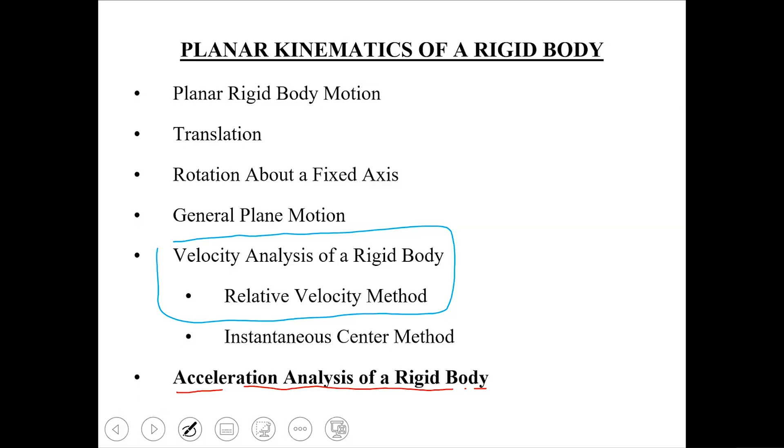So probably we are going to solve 2 examples relevant to this acceleration analysis, and since in both those examples the angular velocities are unknown to us, so probably first of all we need to perform the velocity analysis. तो एक तरह से आपकी क्विज की रिवीजन भी हो जाएगी जब हम velocity analysis perform कर रहे होंगे. So starting with the first problem,

which is problem 16-120, in which we have a rigid body mechanism being shown to us. The piston is moving towards the right with a speed of 5 feet per second and an acceleration of 3 feet per second square. We need to determine the linear acceleration of point A, which is constrained to move within the curved path having a radius of 1.5 feet.

So in order to determine the acceleration of point A, first of all, since omega is not known to us, we need to find out this omega, that is omega of this rod AB. In order to perform the velocity analysis first, can you tell me what should be the value of VB vector? We are using the conventional XY coordinate system.

Since the piston is moving towards the right, point B or piston B would be moving with a speed of 5 feet per second. That is, the vector form of VB is going to be 5i. What about the motion of link AB? Is it rotation or general plane motion? General plane motion. So it is general plane motion.

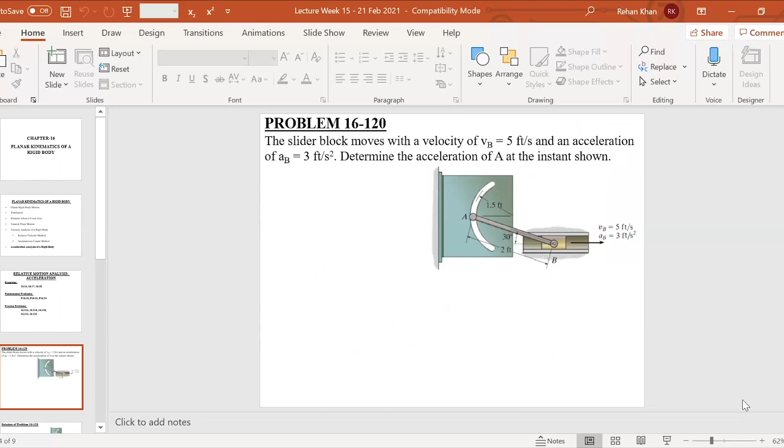Okay, now moving on to the acceleration analysis. In order to perform the acceleration analysis, it is given to us that this piston is moving towards the right with an acceleration of 3 feet per second square. So again, starting from that piston, the acceleration of point B is given to us as 3i feet per second square. And since link AB is in general plane motion, we are going to write the relative equation for this link AB, taking B as our base point.

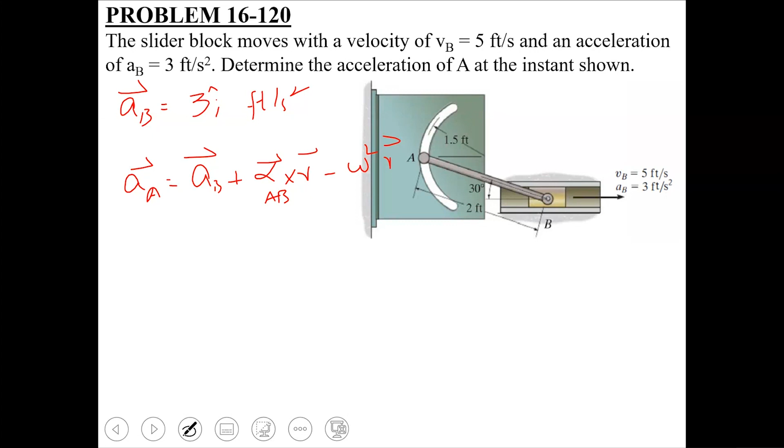So that equation would become aA, which is the absolute acceleration of A, should be equal to aB, which is the absolute acceleration of B, plus alpha cross r minus omega square r, where alpha is going to be the angular acceleration of this link AB, omega is going to be the angular velocity of this link AB, and r is going to be the relative position of A with respect to B.

So these are the vectors जो कि हमने लिखने होंगे. As we know that aB is basically equal to 3i plus alpha cross r. Again, alpha is assumed to be in a counterclockwise direction, so we can write this as alpha AB k cross rAB. rAB हमने already निकाला है पिछले step में, which is minus 1.732i plus j. So this was our rAB, minus omega square. Omega अभी again हमने last step में निकाल लिया था, which was 5. So 5 square into minus 1.732i plus j. So this is going to be our right hand side of this equation.

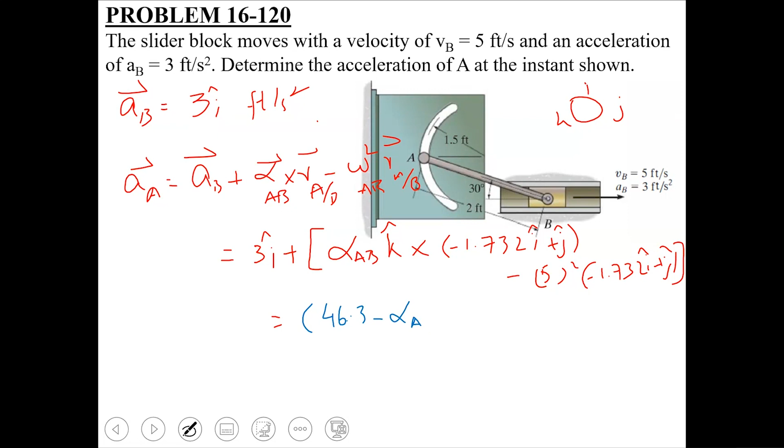Again, we are going to use the smaller circle method for finding the cross product. So once we evaluate this cross product, the right hand side of this equation would be of the form, अगर मैं उसको simplify करके लिख दूं, it should come out to be 46.3 minus alpha AB i minus 1.732 alpha AB plus 25 j. So this is going to be the right hand side, whereas the left hand side represents the absolute acceleration of point A. So let us say that this is our equation number 1.

Okay, now as far as the acceleration of point A is concerned, since point A is constrained to move in a circular path, the acceleration of point A would comprise of two components. The first one is the tangential component of acceleration, which is aAt. The second one is the normal component of acceleration, which is aAn, and the total acceleration is going to be the vector sum of tangential and normal components. I hope के ये चीज याद है आपको chapter number 12 की. Yes. Okay, so what about the normal component of acceleration? What should be its magnitude?

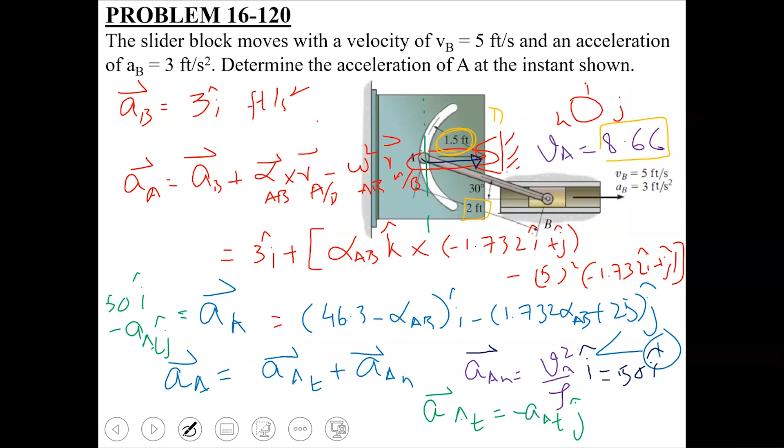So replacing this AA as 50i minus AAT j and then comparing the i and j coefficients on both sides of equation number 1. If you compare the i coefficients, 50 should be equal to 46.3 minus alpha AB. Once you compare the j coefficients, minus AAT should be equal to minus 1.732 alpha plus 25. So once you solve it, alpha AB comes out to be minus 3.70 radians per second square. The negative sign indicates that the assumed direction of alpha is reversed. That is, alpha is acting in a clockwise direction.

Solving for the other unknown, AAT, will give you 18.59 feet per second square. And since it comes out to be a positive quantity, the direction of tangential component is in line with the direction of velocity. Is this point clear to all of you? Yes. So once you have found AN and AT, the overall acceleration would have a magnitude of AT square plus AN square whole under root, which comes out to be 53.34 feet per second square. Clear है? कोई query velocity acceleration के हवाले से जो आप पूछना चाहें?

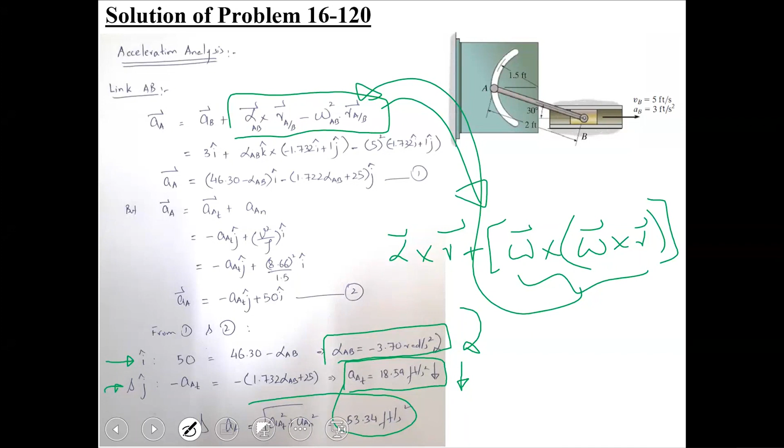Okay, any other thing which you want to ask regarding problem 16-120? Okay, so moving on to the final problem of this course, problem 16-121, and you can expect a problem of this sort in your final exams as well. Again you have a rigid body mechanism with a link AB, the crank, rotating with an angular velocity of 6 radians per second and an angular acceleration of 2 radians per second square, both directed clockwise.

So this crank AB is rotating in a clockwise direction with this much of kinematics. You are asked to determine the acceleration of point C, which is constrained to move within the curved path shown, having a radius of 150 millimeter. You also need to find the angular acceleration of this connecting rod. Since omegas are not given to you, so first of all, again, आपकी एक तरह से revision हो जाएगी.

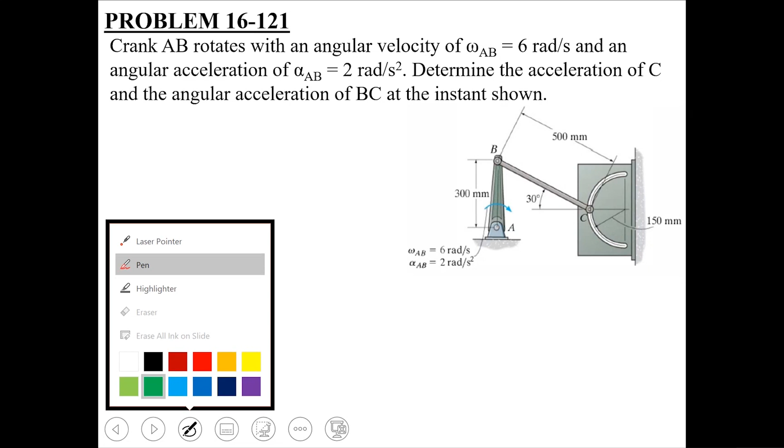We need to perform the velocity analysis, and then we are going to determine omega BC from that analysis, and then we are going to use that omega in order to perform the acceleration analysis. So velocity analysis हमने शुरू करनी है. किस लिंक से हम उसको स्टार्ट करेंगे? लिंक AB. Link AB से start करेंगे.

So in order to find out the velocity of point B, since link AB is in pure rotational motion with respect to point A, VB should be equal to omega cross R, where omega is the angular velocity of this link AB and R is basically the absolute position vector RB. Now, since this link is already given to us rotating in a clockwise direction, we are going to put its correct value, which is minus 6k because of that clockwise rotation. अब आपने assume नहीं करना, जो चीज आपको given है उसको आपने उसी form में लेना है. So it is going to be minus 6k cross RB.

So what is this vector RB? Vertical 300 millimeters. So vertical है 300 millimeter, positive, negative? The positive, upward. So it is going to be 0.3j. So once you take this cross product, what is k cross j? Negative i. Negative i, so negative negative positive हो जाएंगे, and it comes out to be 1.8i. So VB is going to be 1.8i. Okay, moving on to the next link.

Which is the next link at which we are going to move? BC. It is the connecting rod which is link BC. So what should be our base point? Point B. So we are going to write the relative velocity equation, which is VC equal to VB plus omega cross R. Now omega is going to be omega BC, which is the angular velocity of this link, and R is going to be the relative position of C with respect to B.

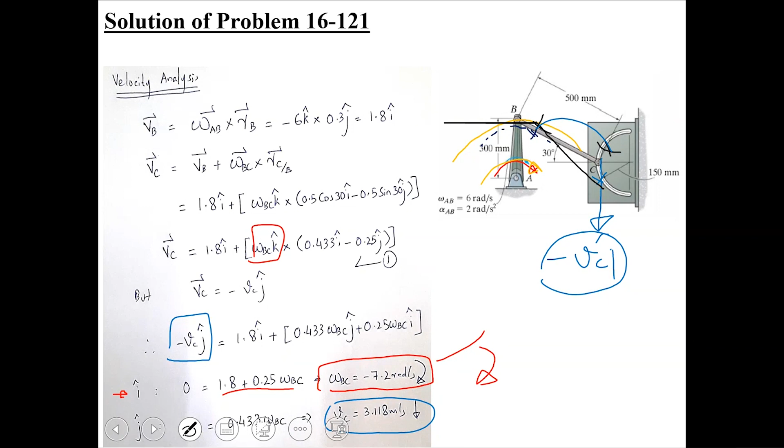Okay, so once you have completed this velocity analysis, let us now move on to the acceleration analysis, because we were asked to determine the acceleration of point C as well as the angular acceleration of this connecting rod. So in order to start this acceleration, we are again going to start from point B, but since point B is doing circular motion with respect to point A, what should be the acceleration vector of B with reference to link AB? Point B is in pure rotation with respect to point A. So acceleration क्या होगा? Alpha cross R minus omega square R, where alpha is the angular acceleration of AB, omega is the angular velocity of AB, and R is the position vector of point B with respect to fixed point A.

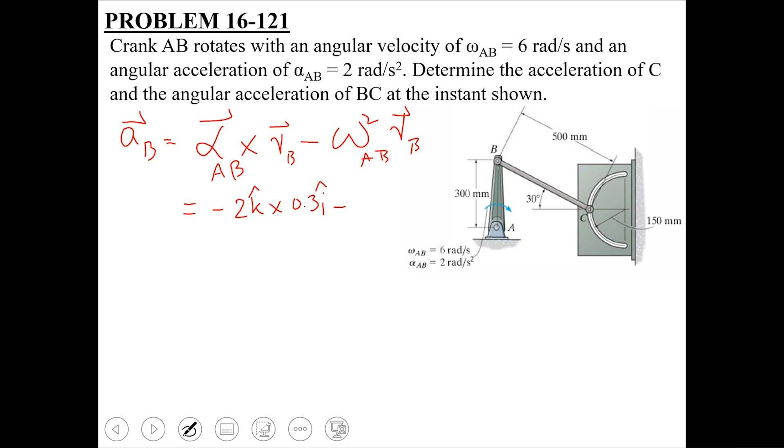So alpha cross R minus omega square R. Alpha is given to you as 2 radians per second squared in a clockwise direction, so you are going to write it as minus 2k cross 0.3 J. इसी तरह minus omega AB, which is 6 square, times 0.3 J. So this would become 0.6 I minus 10.8 J meter per second square. So this is going to be the absolute acceleration of point B. Clear है यहाँ तक? Okay, the next link to which we are going to move is the connecting rod. So we are going to make point B as our base point.

The equation would become acceleration of C to be equal to acceleration of B plus alpha cross R minus omega square R, where alpha is now the angular acceleration of link BC, omega is going to be the angular velocity of link BC, and R is going to be the relative position vector, relative position of C with respect to B.

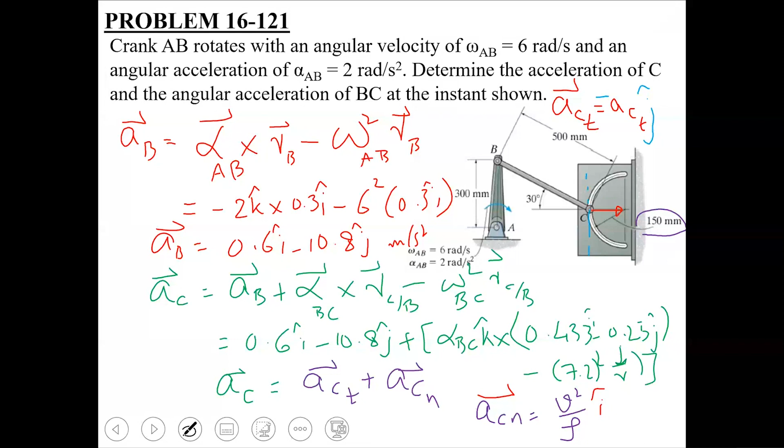Okay, so now comparing the I and J coefficients on both sides of this equation. Once you compare the I coefficient, you get this equation. Once you compare the J coefficients, you are going to get this equation. Solving these two equations gives alpha, the angular acceleration of this connecting rod, equal to 346.6 radians per second square. Since this value is positive, your assumed direction of alpha is correct. Finding ACT, it comes out to be a negative quantity.

What does that mean? Deceleration. It means that the tangential component of acceleration is acting upward, isn't it? Decreasing acceleration, sir. See, the velocity was in the downward direction, which we found in the first step. The tangential component of acceleration is opposite to the direction of velocity. What does that mean for curvilinear motion? Retardation. What is happening to the magnitude of velocity? It is decreasing. That's why the tangential component is opposite to the direction of velocity. Is this point clear to all of you?

Yes, sir. Because what does the tangential component of acceleration represent? From chapter 12, the tangential component of acceleration represents the rate of increase or decrease in the magnitude of velocity. If the velocity's magnitude is increasing, ACT and V are in the same direction. However, if the tangential component is opposite to the velocity, then the magnitude of velocity is decreasing. Okay, is this understood by everyone?

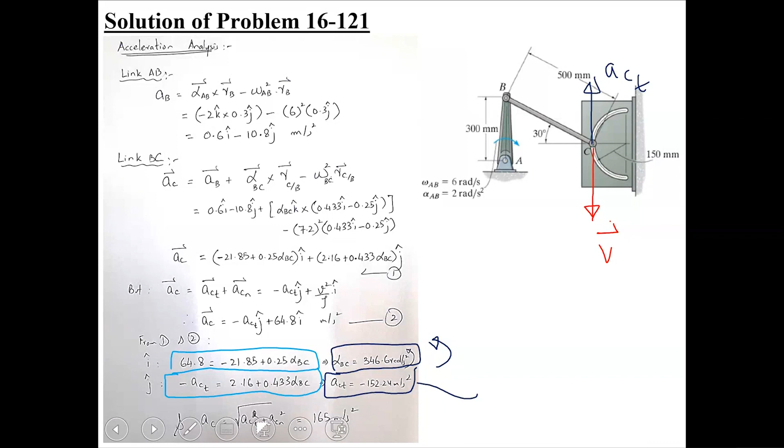Okay, so with this, our course for the final exam is being completed.